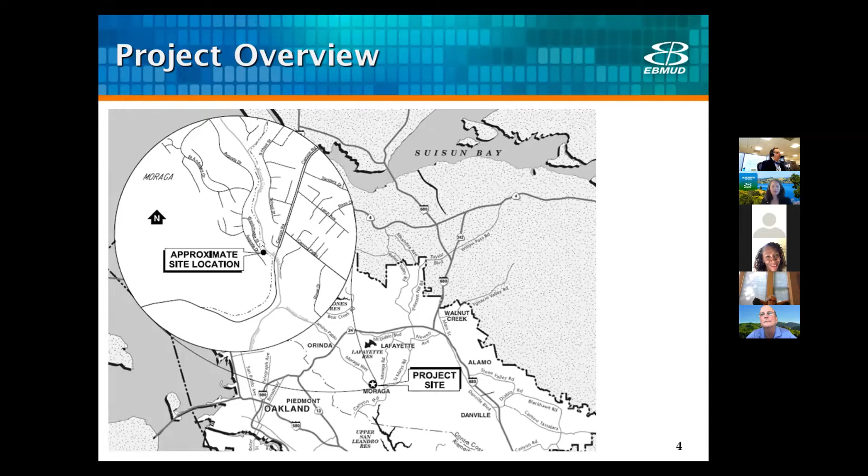So an overview of the project, here is where it is located. And hopefully you can see my mouse moving. It's at the southern end of Westchester, east of Augusta Drive. And the creek is shown here to the east. So I'm going to overlay a photo here, an aerial photo, just so you can see the boundaries of the project. And here is the creek with this dense tree coverage and the school for your reference.

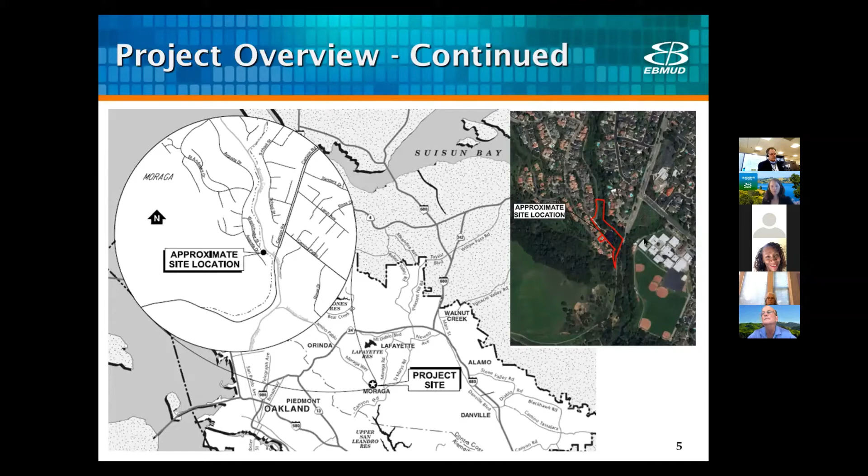So our project is going to be to come in and restore the slope by constructing a terraced, two-tiered stitch pier and tieback earth retaining system. Then we'll regrade the slope back to its original topography, and we'll restore the East Bay Regional Trail to a temporary condition with a gravel pathway. And then as soon as our project is over, the Parks District will come in and finish off the path.

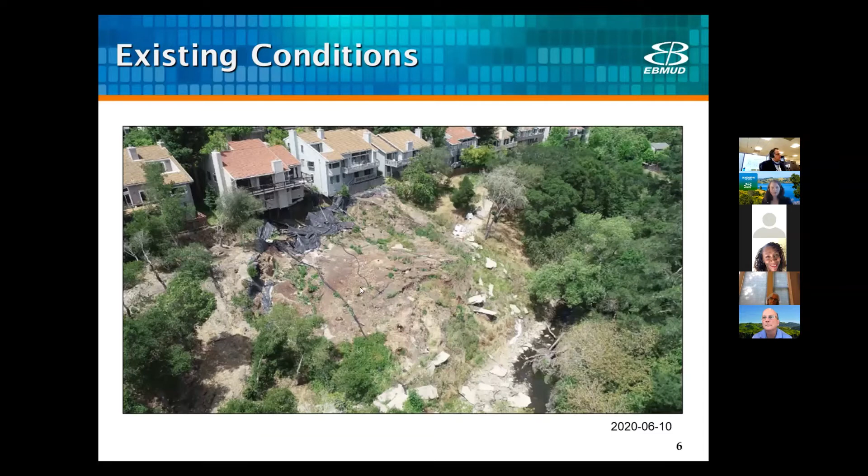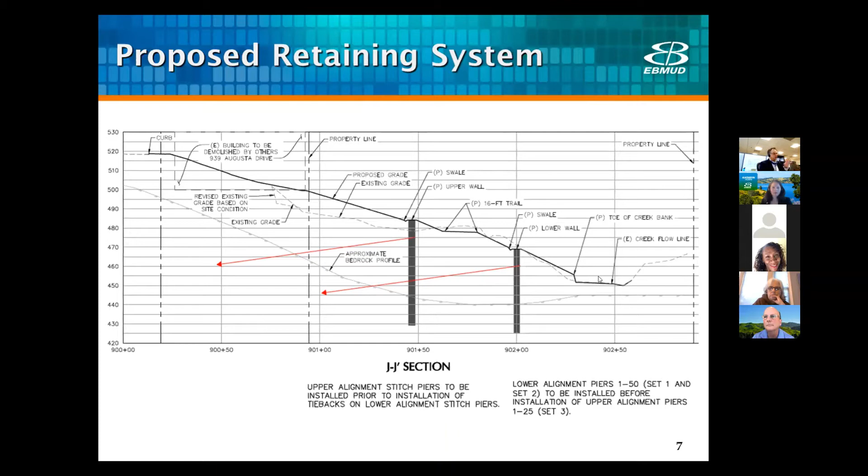It's also called a tieback system because there's these tensioned anchors, these red lines here, that tie the slope back. So we're also securing it across this interface here and securing it across this interface here to arrest that movement. So the next image I'm going to show is if you were standing in the creek looking back towards the slope, back up the hillside. So this is what it looks like in profile view.

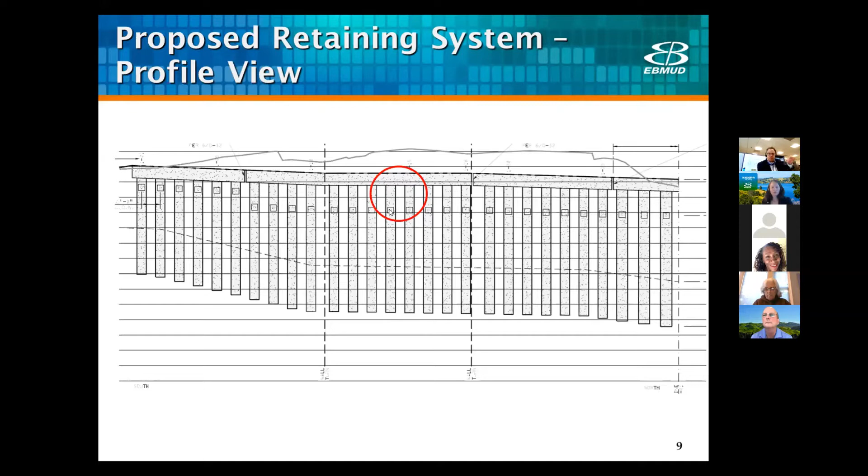And I'm going to zoom in here on the next slide to show you the tieback details, because these little squares here inside the red circle are those tiebacks. And if you can picture them going into the page, they're the anchors. So here's another depiction again in cross section of what that looks like. On the left, here's the ground slope again. Here is the stitch pier, concrete, and then it gets capped off with a cap beam, which is a beam that runs in and out of the page, as shown on this image here.

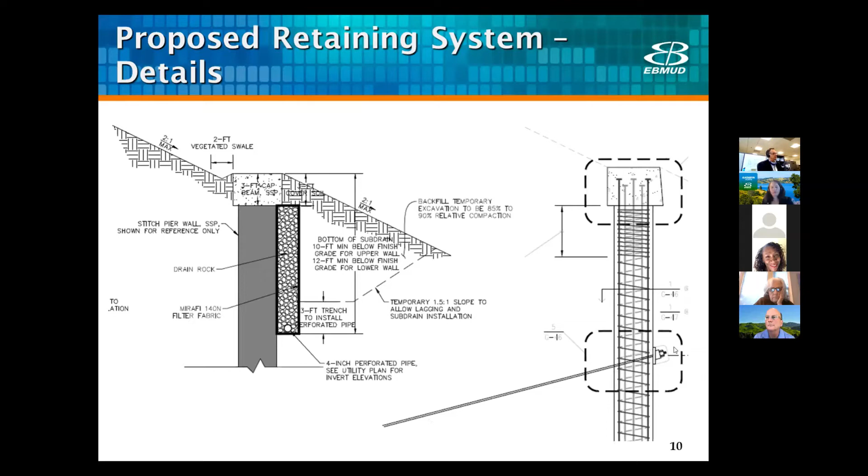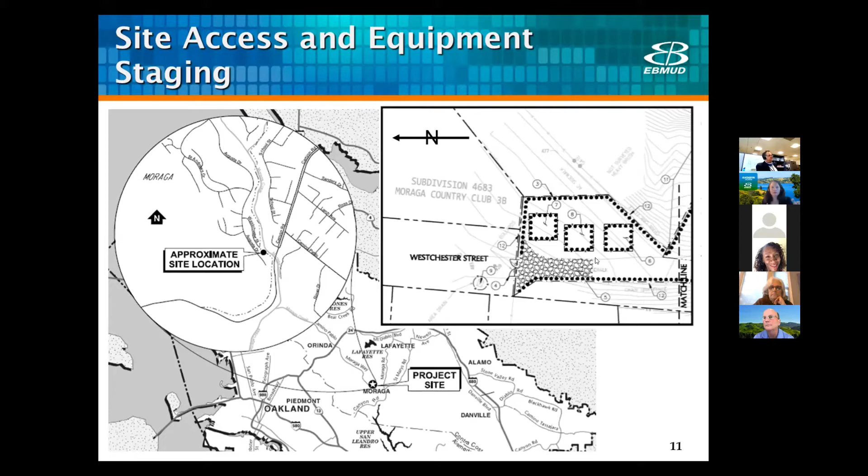So the construction sequencing is a bit of a complex puzzle because it's a fairly tight site and we're going to build it in stages, and it's a 2-year or 2-season project. So again, this image here is oriented with north to the left. So just for your reference, here's Westchester Street. Here is the creek. Here is Canyon Road with the new bridge. And here's Augusta Drive. And you can see the homes along Augusta in the footprint here.

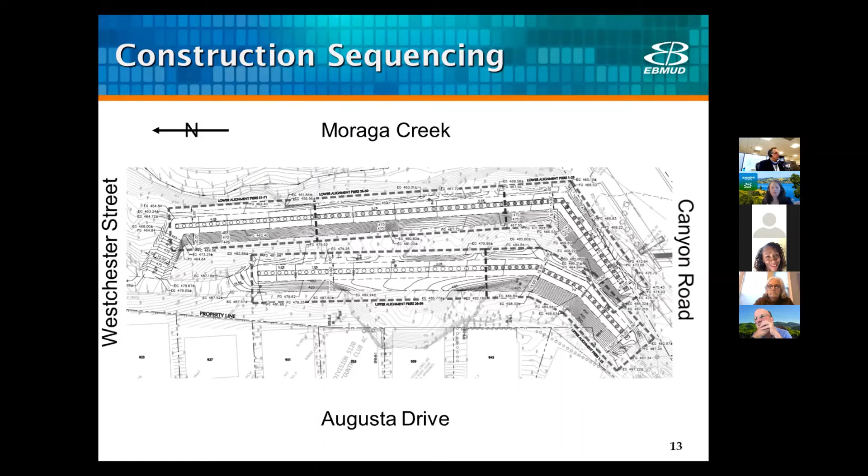So the terraced system consists of a lower wall here, which looks like a hockey stick, and then the upper wall. And each of these circles are those stitch piers or soldier piles, if you want to think of them that way. So in our first season, shown in purple, we're going to have the contractor come in and they'll start at this end next to the bridge, and they'll start building the lower wall or terrace, and they'll work their way back out. Now, the intent with doing that is to stabilize the lowest part of the slide. We want to cut it off at the pass, right at the toe, and arrest that movement first.

And once we've done that, then it'll be easier for the contractor to come in with their heavy equipment and now work on the upper terrace here. So then they'll build this portion in the first season, and then they'll button up the site, winterize it, and move off the site for the winter. The next season, they'll come back in and they'll finish the remaining portion of the lower tier here, shown in blue, and then they'll finish the remaining portion of the upper tier. And then after that, they do the slope restoration and the final landscaping.

So as part of this, in order for them to get in there and do the site, there are going to be some trees removed, a number of trees. And so this image shows the outline of the tree as a circle with an X through the trunk where it's going to be removed. And so these green ovals are showing the trees that'll be removed to facilitate construction. Some of the trees will be protected, particularly down here in this corner.

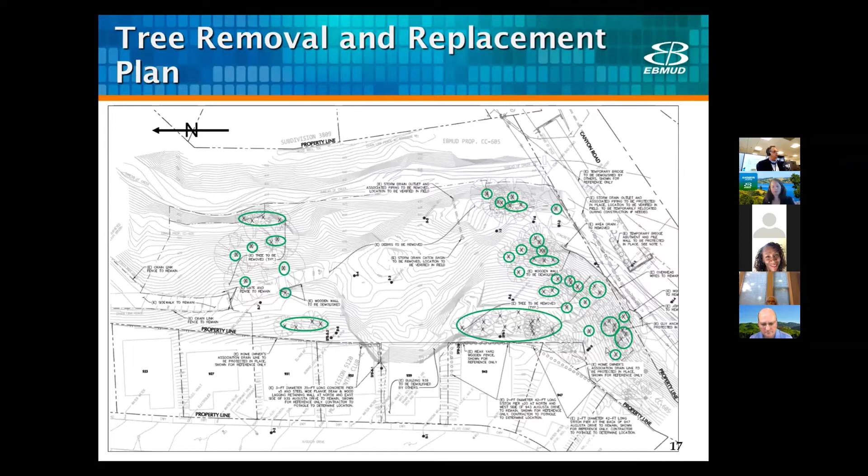So there are a number of environmental considerations to contend with. There are protected species in the area, such as raptors, which are birds, whip snakes, pond turtles, red-legged frogs, tiger salamanders. And we're going to have the contractor install exclusion fencing, and that's what this detail is showing here. And so an exclusion fence is a barrier to allow the critters to exit the construction site through this porthole at their own free will, but then it prevents them from coming back in. So they'll be able to leave at their leisure and then hopefully stay out.

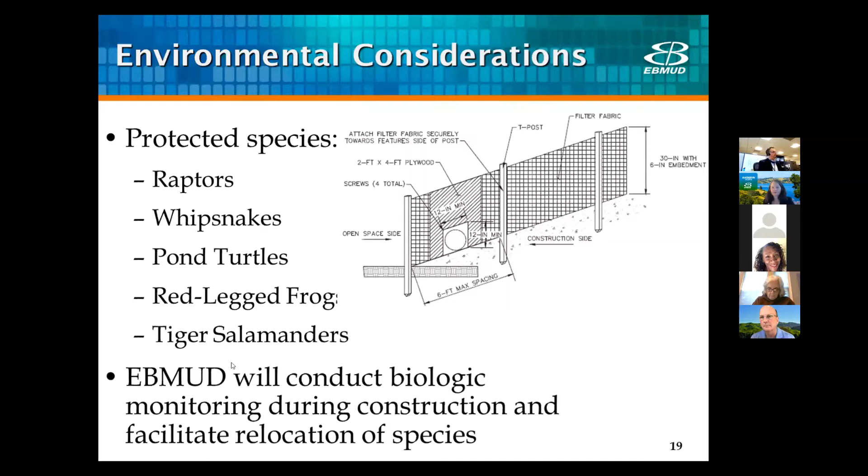But even if they don't, we're going to have biological monitoring during construction, and monitors are actual people. They're inspectors whose sole job is to look for these protected species and facilitate relocation of them should they still be found within our footprint. We're also going to protect the creek itself. So the contractor is going to take steps to minimize erosion of the stockpiled earthen materials and runoff along the native slope.

So these temporary measures, you might remember from that first image I had of the staging area where I mentioned the fiber rolls, which are these coconut fiber logs that keep debris from flowing. Silt fences are those black fences you're probably used to seeing on construction sites that allow water to pass through but not sediment. Construction fencing is that orange plastic fencing to keep pedestrians out. The check dams are sandbags strategically placed along the site.

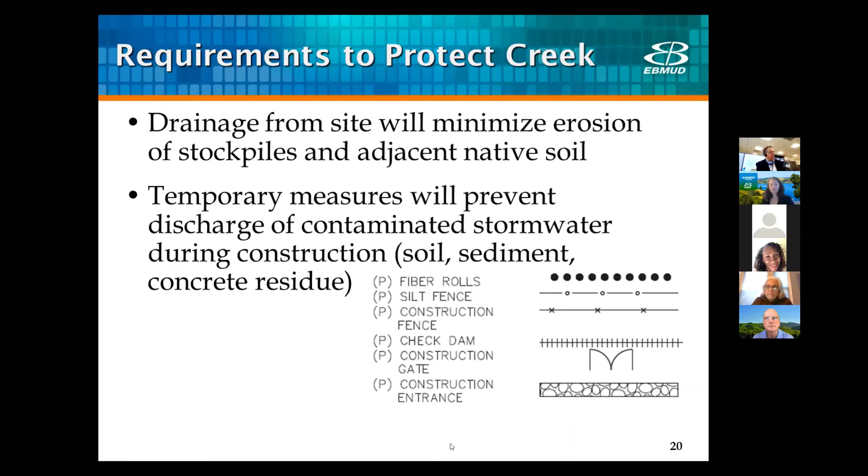And then we'll have a construction gate, and the entrance will have gravel. So as the work vehicles travel from our site back onto Westchester, they'll be going across a gravel path to rumble their tires and have sediment fall off the wheels. It's a standard Caltrans type detail that we've applied here.

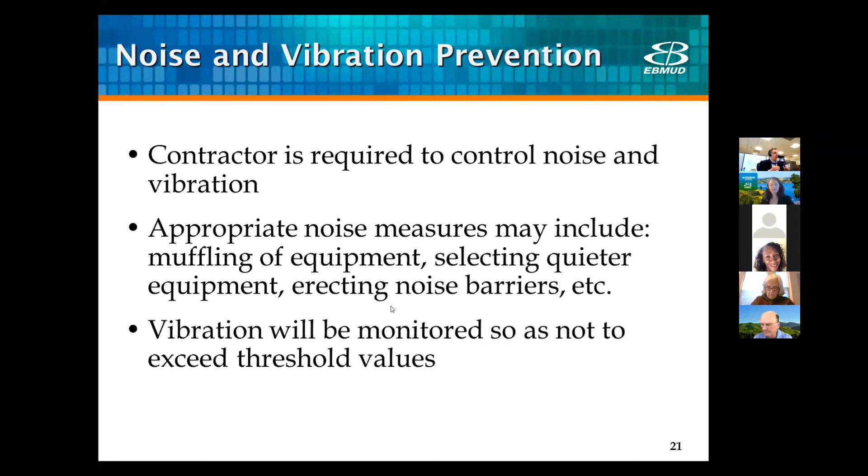The contractor is also going to be required to control noise and vibration. The measures that he'll have to submit and our specifications require all this. It could be muffling of equipment, selecting quieter equipment, even erecting noise barriers if needed. And then the vibration will be monitored so as not to exceed these specific threshold values.

So here's an artist's rendering of what the final configuration will look like. And in the upper right-hand corner is that first photo I showed. And this is what it will look like at the end of the day. The trees in this image have grown about 4 to 6 years, and you can see the pathway here. And here's that cap beam. So the wall, the system is buried below there. Here's that upper hockey stick, if you will.

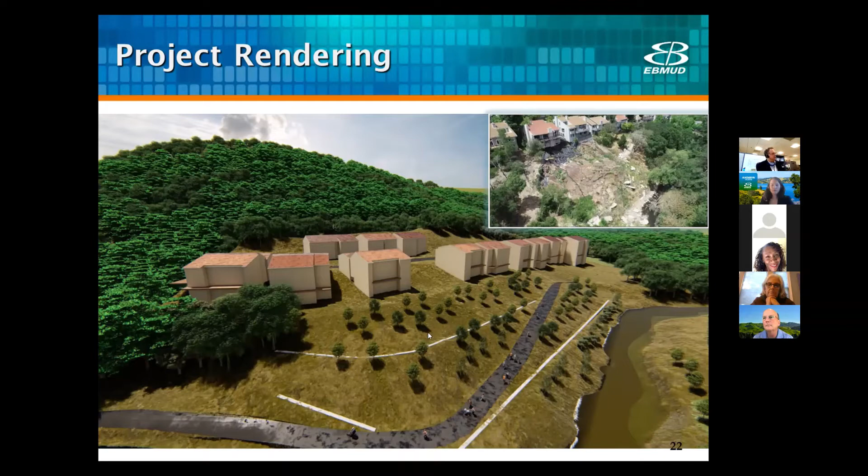So here's some more details. Now in this photo, we're looking kind of to the southwest towards the Valley Vista staging area. And so stacked on the left-hand side here are the types of reconstruction details we'll be applying. So down at the creek is going to be riprap, which is large sort of cobbly boulders held in place by live willow stakes.

And then as you go up the slope from there, we're going to put this coir matting, which is again sort of a coconut fiber mat with seeding underneath it, and the seed will eventually grow through this mat, but the point of the mat is to hold the seed in place on the relatively steep portion of the slope. And then as you get up into the flatter areas toward the top of the slope, we'll spray hydroseed, which when it's first put on, it looks like a green papier-mâché, those of you that may have seen it, but eventually the seeds sprout through and it just looks like a natural grassy hill.

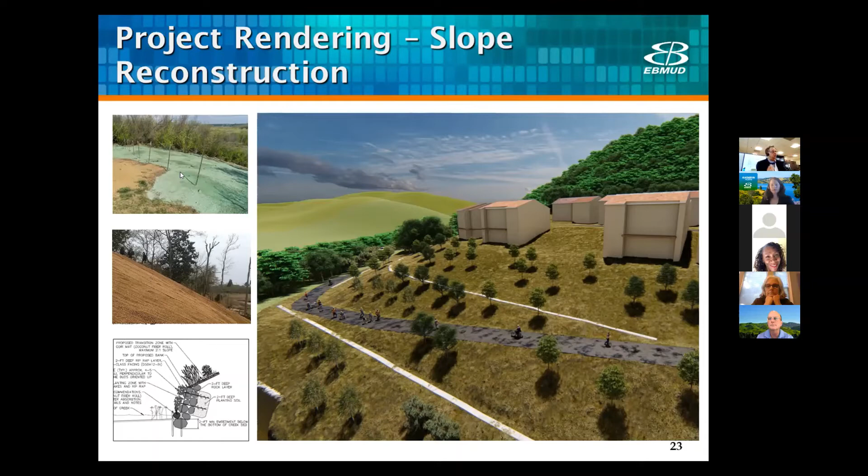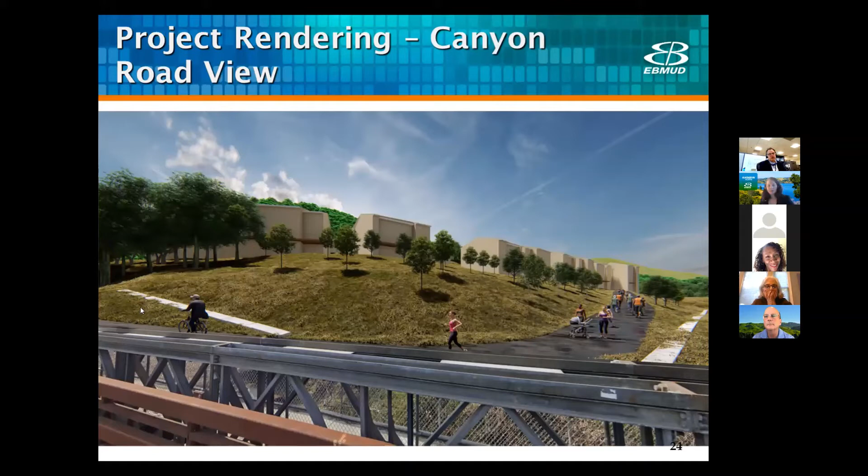Here's another shot from the new Canyon Road Bridge looking back to the north. And as part of East Bay Regional's work, they'll put in a new gate for emergency vehicle access, similar to what was before.

And so the project schedule will be 8 to 5, weekdays only. The first season is envisioned to start this summer, 2021, and go through the fall of 2021, and then they pull off site for the winter like we talked about. The second season will start in the spring of 2022 and go through fall of 2022 when the project will be complete. And then East Bay Regional comes in, finishes up the trail, and our East Bay MUD crews come in and restore the underground water main.

Great, thank you so much, Sam. So I'm going to be welcoming questions both via the chat function. Please make sure that you are sending your question to everyone in the chat function if you would like it read out loud. If you do have just a private question you would like answered, you can chat me or you can email me later. I'll also be looking for hands raised. If you're able to raise your hand, please do. Sometimes the hand raising doesn't quite work, so you might just use, I think there's different reactions, a little wave or something like that, and I'll try to call on you.

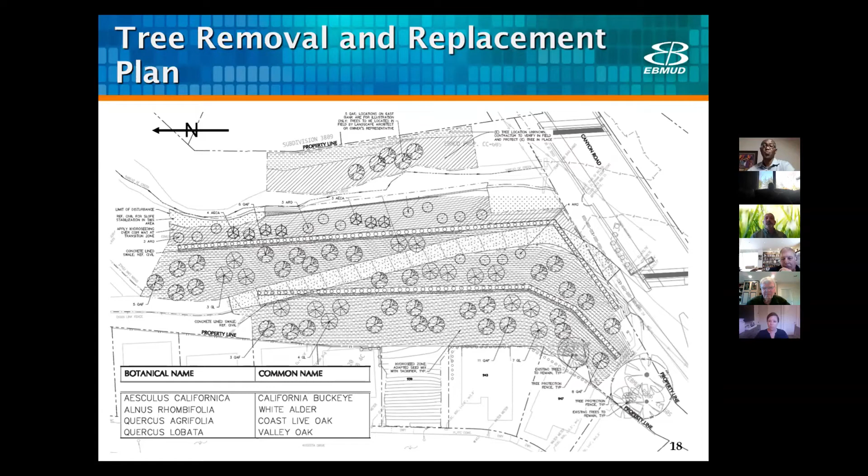Thank you. Can you explain why the underground water main can't be turned back on until after work is complete? Will it be fully inspected and repairs made? What restoration work can we expect on our driveways and street? So I'll let Elizabeth chime in a little bit more about that, but it has to do with local slope stability versus global slope stability. If you recall from that picture where we're coming in like a checkerboard to stitch it together in stages, that's taking care of local instability, but the global instability we would like to completely have nipped in the bud. But if Elizabeth wanted to say anything more.

Just building on your point, Sam, the water service was moved above ground so that safe water supply could be provided to the neighborhood. Out of an abundance of caution, we want to make sure the whole stabilization project is completed before introducing water into the underground main. Now, the concern isn't so much leakage from the main, but if something were to happen and cause further movement of a fully charged main, we wouldn't want a big discharge of water that would cause a larger problem and impact the safety of the area. So that's the scenario we're avoiding. And again, we want to make sure that it's safe for the neighborhood.

And yes, before the main is put in service, it will be inspected, pressure tested, and chlorinated, so that it's safe to introduce drinking water back into the main. Thanks, Elizabeth.

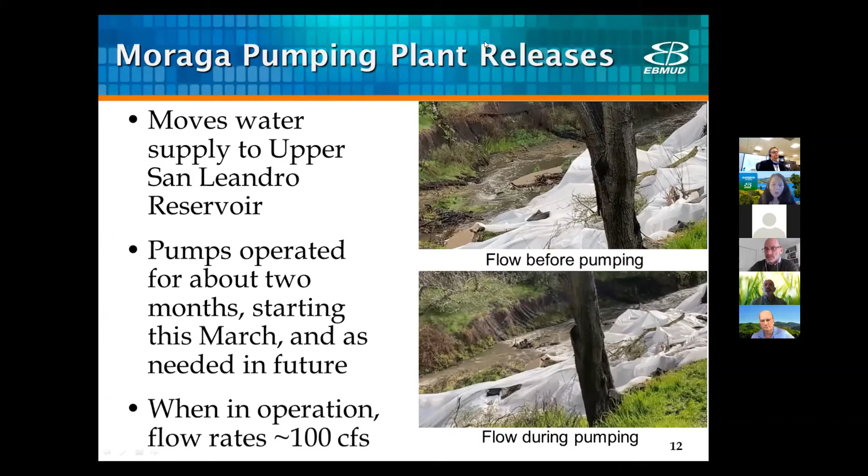Thanks, Elizabeth. Can you explain what the construction was at the transfer station on Country Club? It's a mystery. I don't know if we know that. Ron Haas, I believe, is the general manager of Moraga Country Club, and he's here. Ron, do you know about that? Can you ask the question again? Yeah, it says, can you explain what the construction was at the transfer station on Country Club? Oh, is Country Club a street? I think it's School Street.

I think East Bay MUD has a construction next to the school, right, or next to the church right there, I think. There's a water station construction happening right there on School Street. I don't know what it is. I don't know, Sean, do you know maybe? Sean? Sure. Okay, you got it.

Sure. So if we're referring to School Street, at the end of School Street, there is a Central Contra Costa Sanitary District pump station. That pump station runs along School Street, and they pump all the sanitary material from the sewer system out of town down to Martinez. And so that's the beginning of the start. That station was rehabbed, reconstructed to handle the current needs of their infrastructure. So they're going to be finishing that up this year. It's completely separate from this project and not connected.

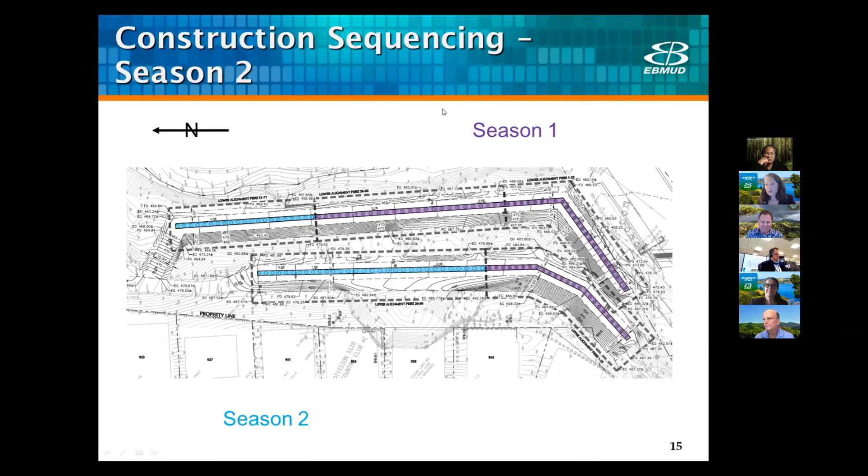Okay, another chat question. If the timeline changes, as Elizabeth implied it could, how will we be notified? Well, great question. I'm going to take this one because, for instance, with this meeting, we employed a lot of different outreach techniques to get the word out. The town graciously let us advertise this meeting in their newsletter. We used Nextdoor, our existing email list, etc. So I think we'll probably be providing fairly regular updates as we move along with those same channels.

Sean Knapp, I hope you will be okay with us providing some updates in your town newsletter, because I think that reaches a lot of people. Yes, of course. So again, this is a complete partnering project.

We have 3 agencies that are looking to complete this project. We all have certain components of the project, but we're all working together. And we have information that we pass back and forth as far as newsletters, outreach, and so it's very much a team effort, and we'll continue that.

As Catherine's been able to do, she's been able to reach out to a large group. I see there's 49 participants on this call, very, very appreciative that you're taking the time to come out. And if there's any way or a suggestion that you'd like us to reach out to you, please do. We do listen, and we will try those different avenues as we can.

Definitely, yeah. So I guess to answer that, if there is a change in schedule, we'll be, it looks like we're getting some email addresses, so great. Yeah, we'll be including those. I'll put those on our email distribution list, and then we'll continue to use Nextdoor and the town's newsletter and our website as well. And then if needed, we can always look at having future community meetings if there's a need and a want on that.

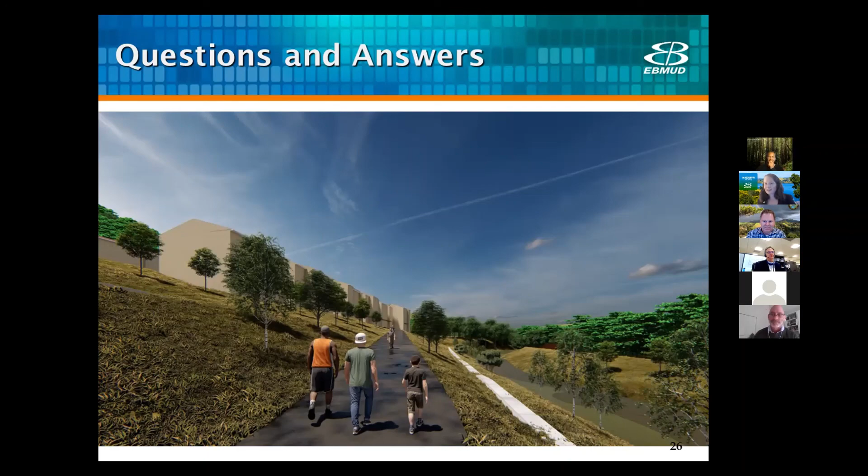Okay, I'm gonna look one more time. If there's any last questions, oh, here we go. Bridgeway construction seems to have suspended construction this winter on the bridge. Sean Knapp, I think that's a question for the town. Yeah, very similar to this project with East Bay Mud. The winter season is not the ideal season to be constructing, digging, and dealing with water and rain and such. And so most effective for the contractor is to work when it's as dry as possible. They have the most production and get the most value for the amount of money they're spending during construction.

So yes, the bridge project did have a planned winter shutdown, and we'll be starting up here in April with the project. You'll see the construction work and different things that go into prepping the site before the major construction starts happening. So looking forward to that. And it'll be the same thing with East Bay Mud's project, as I understand. They potentially will also have a seasonal shutdown unless their contractor comes up with a creative way to construct this all in one season.